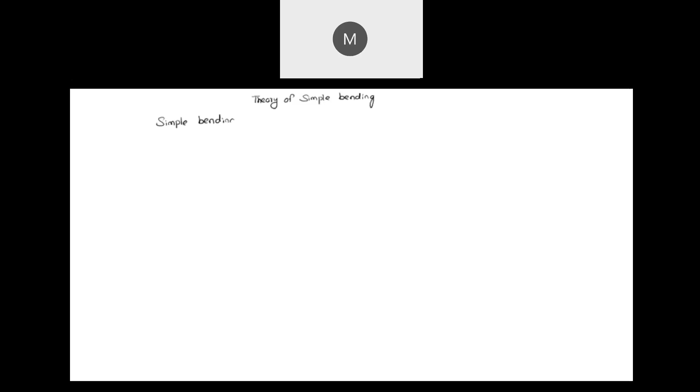Here is simple bending. Simple bending means pure bending, pure bending without any shear, without shear.

The basic assumptions are: the plane sections before bending remain plane after bending, and Hooke's law is valid.

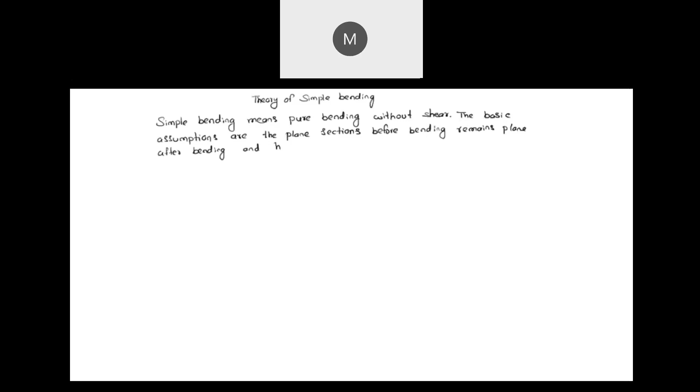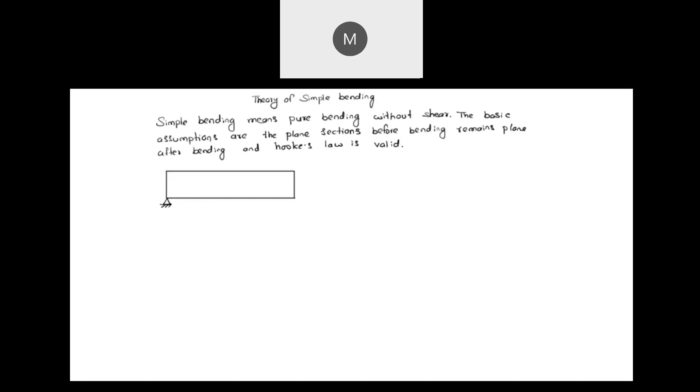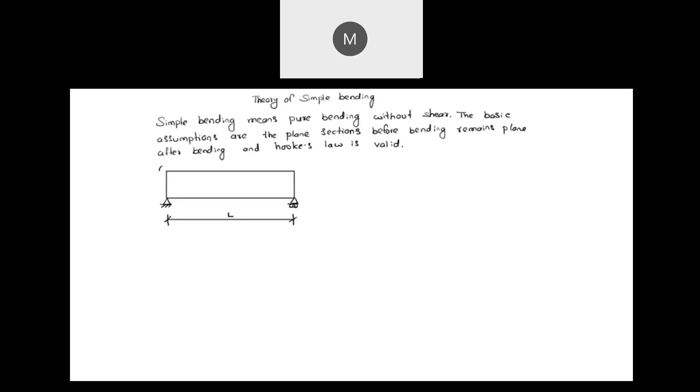Hooke's law is valid. Now let us take a simply supported beam of span L, carrying end couples M each, so that bending moment will be constant throughout the length of the beam and shear force will be zero.

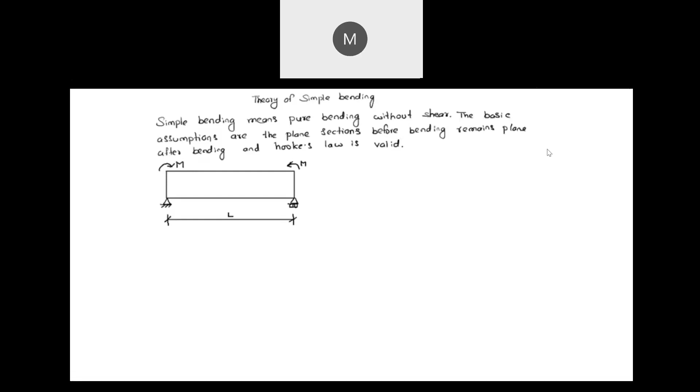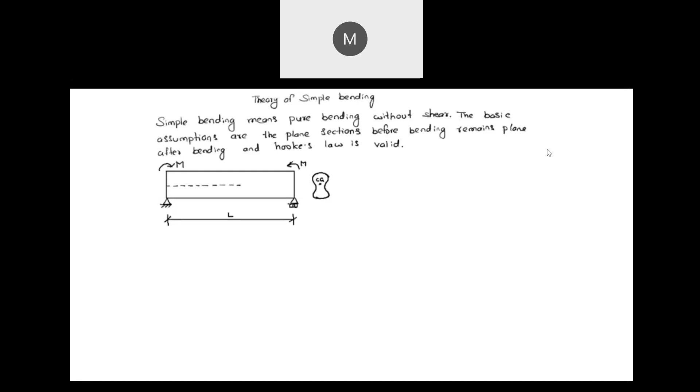Let us take any arbitrary cross section having vertical symmetry. Let us have CG somewhere here. The neutral axis always passes through the CG. We will define neutral axis later. This neutral axis, after bending also, its length is L only. That length will not change at the neutral axis.

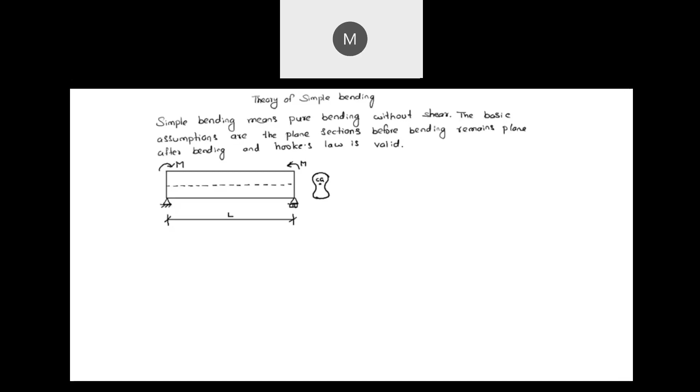Then due to this moment, the deflected shape of the beam is like an arc of a circle.

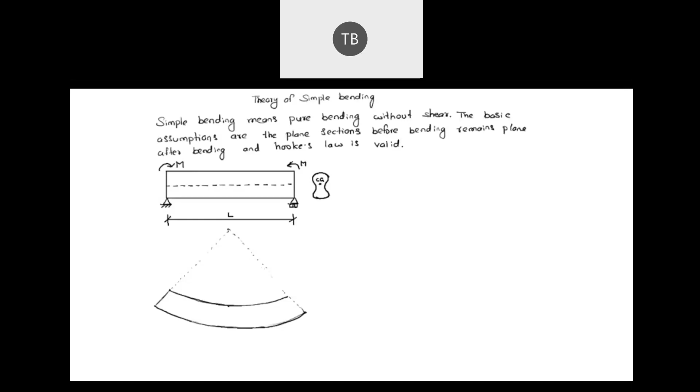It is like this. This is O, the center of curvature, and the neutral axis is here. The length of the neutral axis remains the same as L, and the layers above the neutral axis get compressed, and the layers below the neutral axis get elongated. The radius up to the neutral axis is called R, the radius of curvature of this deflected shape up to the neutral axis.

Let us take this angle as theta, then R into theta equals L. L equals R into theta.

Now we take a layer, y distance from the neutral axis. This layer, it is y distance from the neutral axis, that means here.

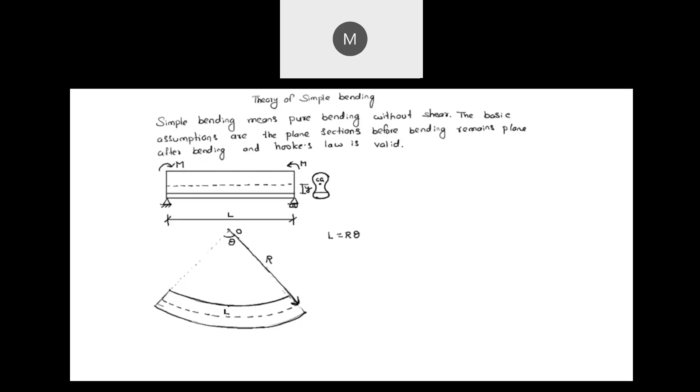Its distance is y. Then its length is L plus delta L. That layer length becomes L plus delta L because of that elongation amount delta L. That means, from the geometry, L plus delta L equals R plus y, into theta.

Theta is L by R, so y into L by R gives delta L by L equals y by R. Delta L by L, change in length versus length, that is called strain. So strain equals y by R. Since R is constant, strain is proportional to y.

So the strain diagram will be like this. The layers below the neutral axis get elongated, that's why tensile strain will be there at the bottom side, and compressive strain at the top side. Top compression, bottom tension. If you take compression as positive, tension will be negative. So this is the strain diagram.

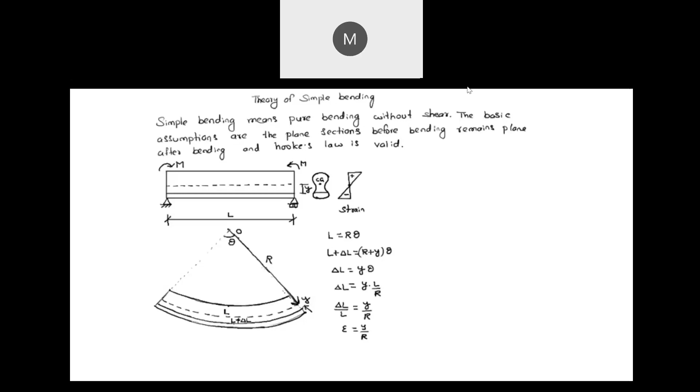According to Hooke's law, stress is proportional to strain, and stress equals strain into Young's modulus E. That is, strain is y by R, so F equals E by R into y.

So for a given material, E is constant, and for a given loading, R is constant. So F is proportional to y again. So the stress diagram also looks similar to the strain diagram, like this, with top compressive stress and bottom tensile stress.

So from this, F by y equals E by R. This is one fundamental relationship of the theory of simple bending.

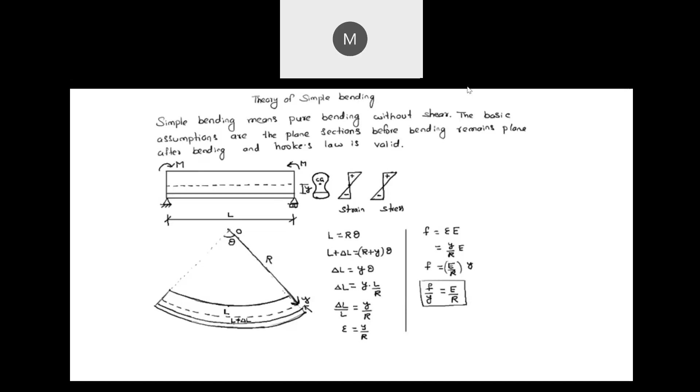Now we will relate the relation between external moment and internal stresses. So we know the cross section is like this, somewhere the neutral axis is there, and the stress diagram is like this.

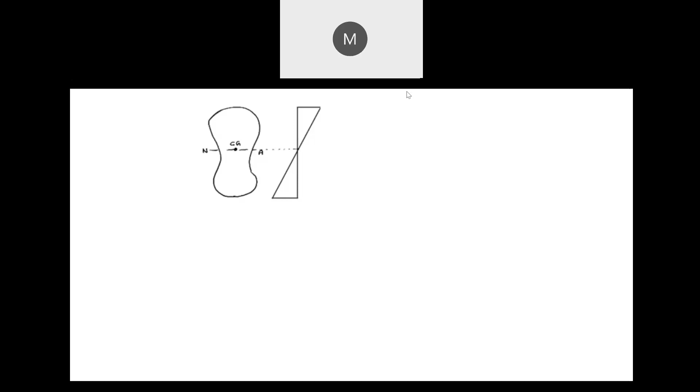Stress diagram is like this. This is the neutral axis passing through CG. Now this is compressive stress and this is tensile stress. Stress diagram, this is the cross section.

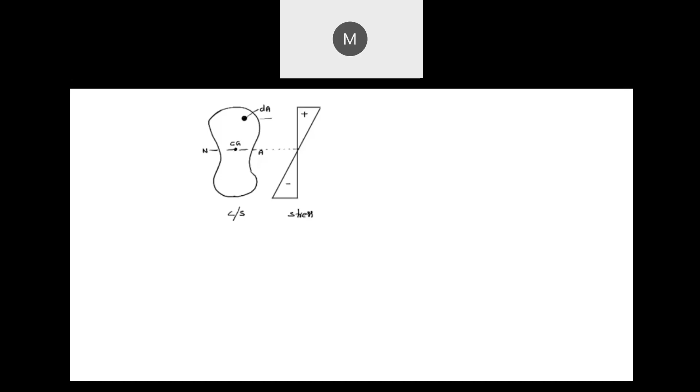Now if you take an element which is having dA area, which is y distance from the neutral axis, the stress at that location, let us take the stress as F.

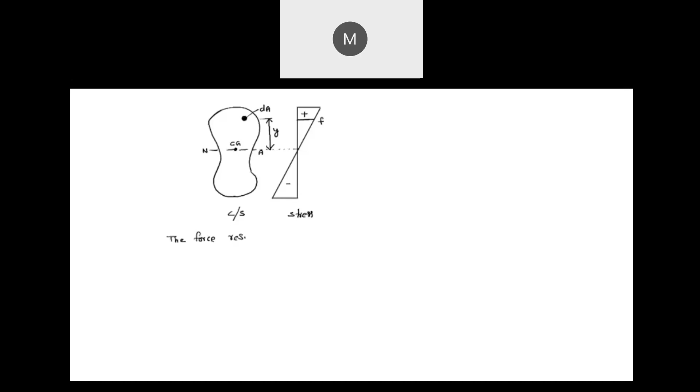Now the force taken by the elemental area dA equal to the force resisted by elemental area dA. Let us take dF equal to stress into area. Stress into area is force. So the force of resistance in dA area is this much.

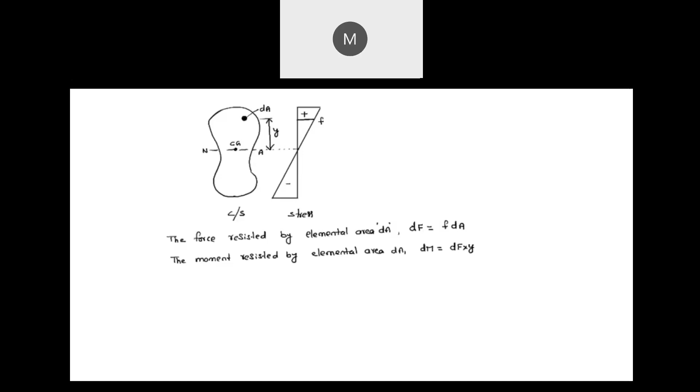And the moment resisted by elemental area dA, dm is nothing but dF into y, force into centroid distance. I mean, distance from neutral axis to centroid, its distance dA distance is y, dF into y, which is equal to f into dA into y.

But we know f by y equal to E by R. The relation already we know: F by y equal to E by R. We know that f is equal to E by R into y. So substituting that relation here, f value: E by R into y into dA into y, that is dm.

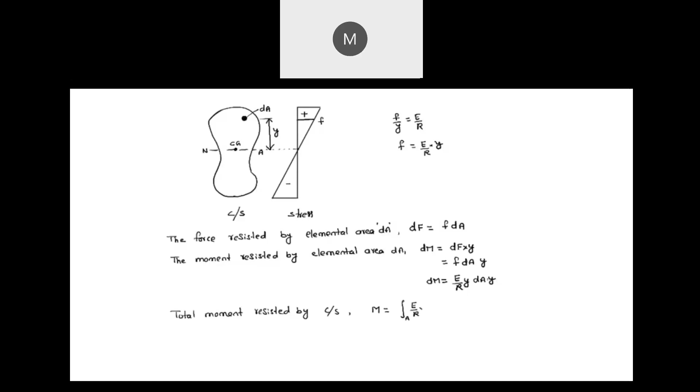Total moment resisted by cross section, m equal to integration over the area into E by R into y into dA into y, which is equal to E by R into integral y square dA over entire cross section area A. So which is equal to E by R into I,

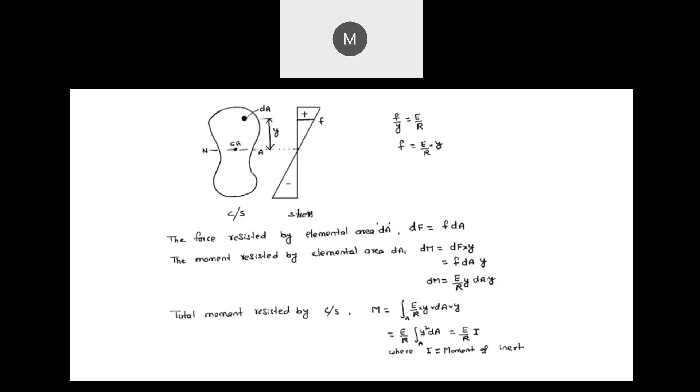where I equal to moment of inertia. So from this we can conclude that m equal to E by R into I, or m by I equal to E by R. So this is one relation actually.

So we have derived two relations. One is the previous relation: F by Y equal to E by R. Now m by I equal to E by R. So combining these two, m by I equal to F by Y equal to E by R. This is the fundamental equation of theory of simple bending.

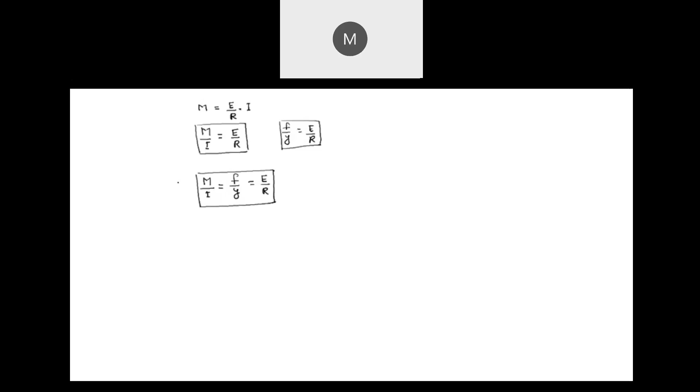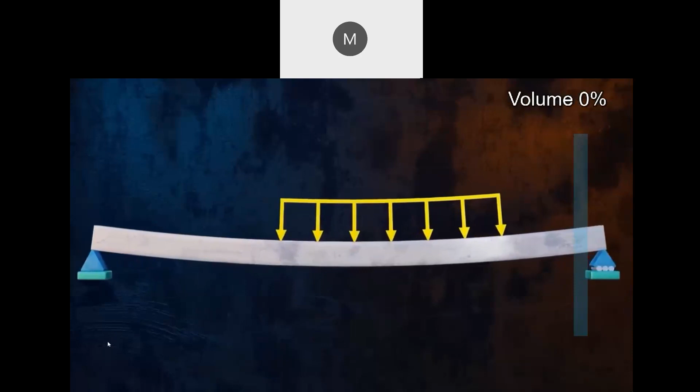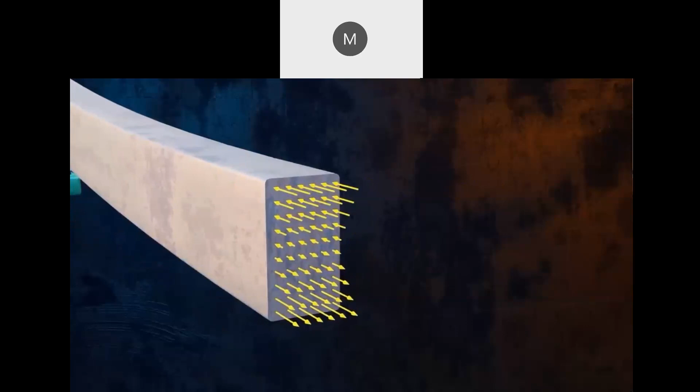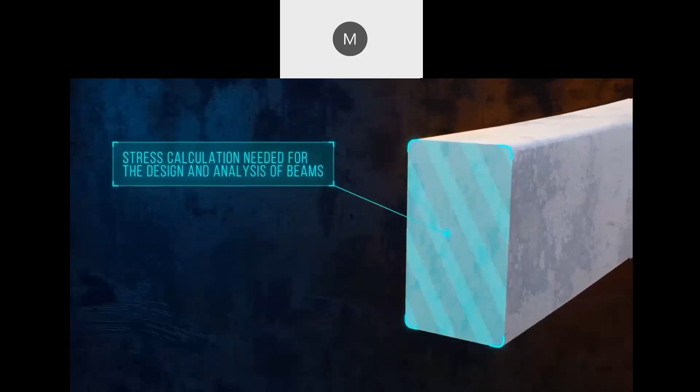If we apply a load to a beam, it will deform by bending. This generates internal stress, which can be represented by a shear force acting in the vertical direction and a bending moment. The shear force is the resultant of vertical shear stresses, which act parallel to the cross-section, and the bending moment is the resultant of normal stresses, called bending stresses, which act perpendicular to the cross-section. It's important to have a good understanding of these stresses because any design or analysis of a beam will involve calculating them. Let's look at bending stresses first.

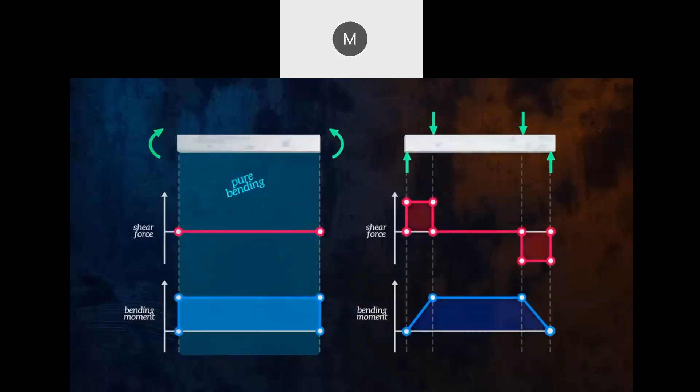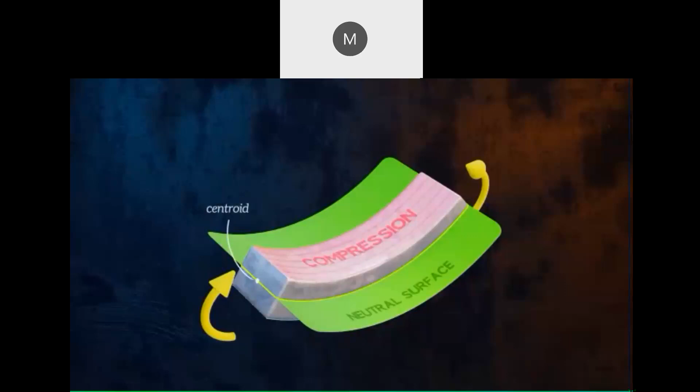Let's look at how a beam deflects when it has a constant bending moment along its length. If we imagine the beam as a collection of very small fibers, as the beam deflects, the fibers at the top of the beam get shorter, meaning that they are in compression, and those at the bottom of the beam get longer, so they are in tension. Somewhere between the top and the bottom of the cross-section, there will be a surface containing fibers which stay the exact same length. This is called the neutral surface. It passes through the centroid of the cross-section. When looking at the beam in 2 dimensions, we refer to it as the neutral axis.

Let's try and quantify the bending stresses that develop within the beam to resist these applied moments. First, let's calculate the strains in the beam. This can be done quite easily just by considering the geometry of the deformation. Let's watch how a fiber at the neutral axis between points A and B and a fiber between points C and D, located at a distance y from the neutral axis, deform.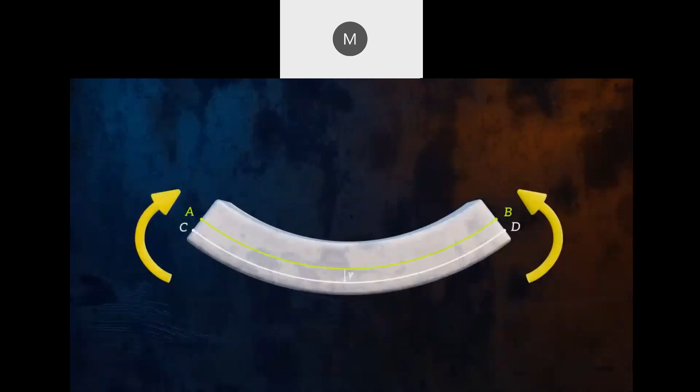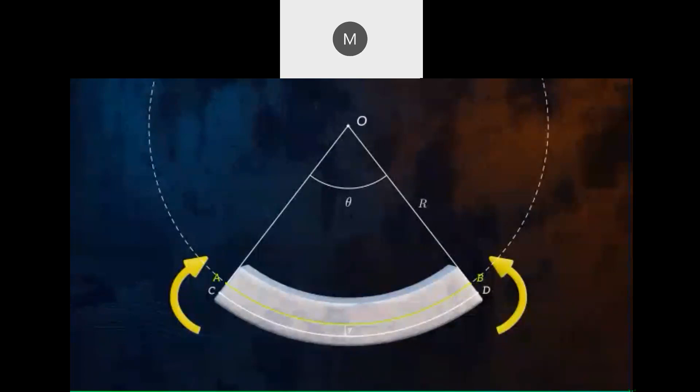Since this is a case of pure bending, we can see that the fibers bend into a perfectly circular arc. We'll call the center of the circle O. Before any deformation, the fibers are all the same length. After the deformation, the length of the neutral axis has stayed the same, but the length of the fiber between points C and D has increased. If theta is the angle of the arc and r is the radius of the arc to the neutral axis, we can calculate the length of the arc between A and B, like this, and we can calculate the length of the arc between C and D in the same way. Strain is defined as the change in length divided by the original length, and so we can derive an equation for bending strain at any distance y from the neutral axis.

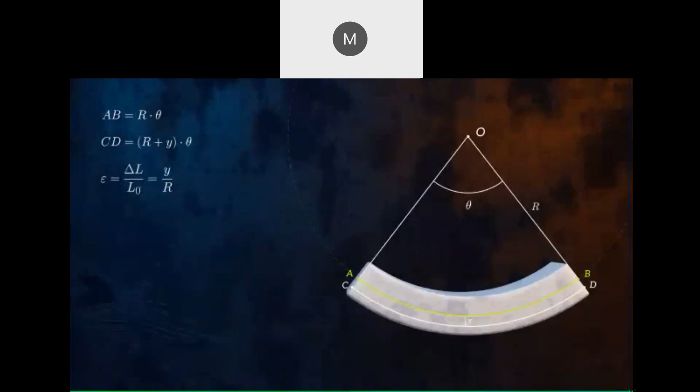We define the distance y as being positive downwards, and so this equation will give us a positive strain for the bottom of the cross-section, which is in tension. Sometimes you'll see this equation written with a minus sign, but that's because y was defined as being positive upwards.

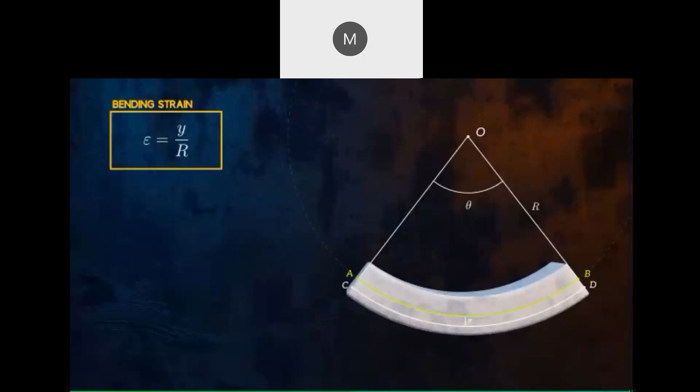If we assume that stresses remain within the elastic region of the stress-strain curve, we can then apply Hooke's law for uniaxial stress to calculate the bending stresses. This gives us the equation for bending stress as a function of the radius of curvature, r, of the deformation.

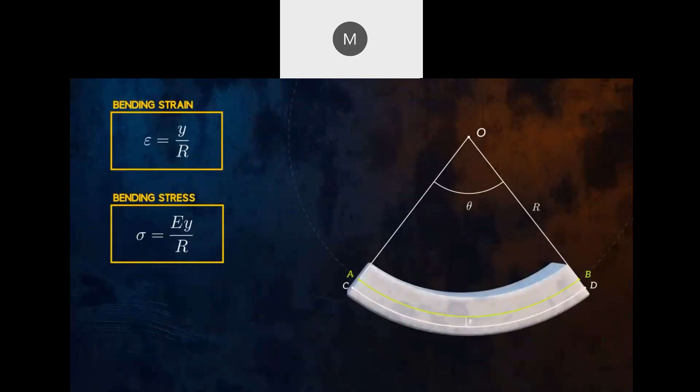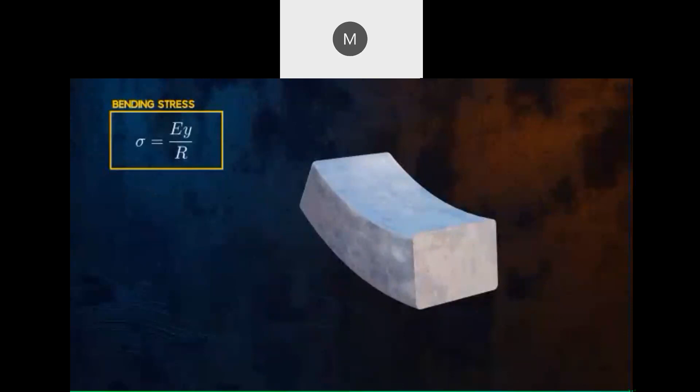But what we're really interested in is how the bending moment, m, affects the bending stress. If we make an imaginary cut through the beam, we can expose the internal bending stresses, represented here as a few discrete forces. The resultant moment of these internal forces must be equal to the bending moment m, and so we can calculate m by integration, like this.

Now we can plug in the equation for bending stress we just derived. When rearranged into this form, we can notice that the integral on the right is the definition of the area moment of inertia. This parameter, which I've covered in detail in a separate video, defines the resistance of a cross-section to bending due to its shape and is denoted using the letter I.

We can combine this equation for the bending moment with the bending stress equation to obtain what is known as the flexure formula.

So what does it tell us? Bending stress increases linearly as the bending moment and the distance from the neutral axis increase, and it decreases as the area moment of inertia increases.

The maximum stress occurs at the fibers furthest from the neutral axis. The term I over y max depends only on the geometry of the cross-section, and so it is called the section modulus, denoted using the letter S. You will often see the section modulus listed for a range of common beam cross-sections in reference texts.

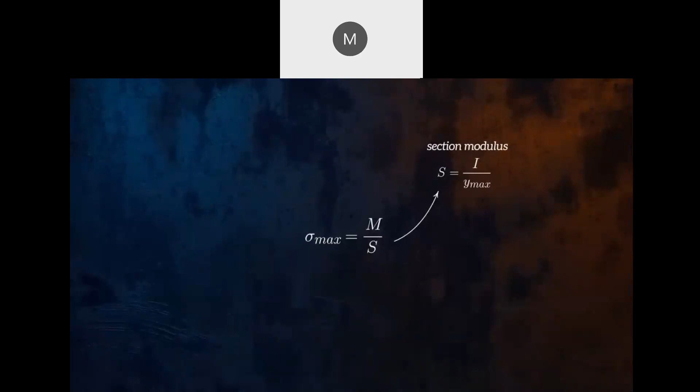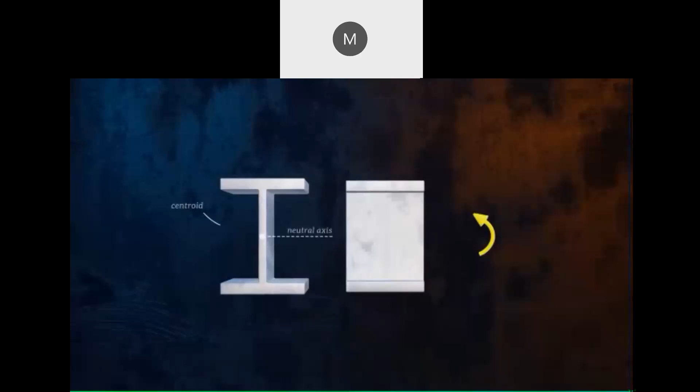The I-beam is a commonly used cross-section because it has a large area moment of inertia, which results in lower stresses. Here's how the bending stresses are distributed over an I-beam cross-section. They are zero at the neutral axis and reach a maximum at the outside surfaces of the flanges.

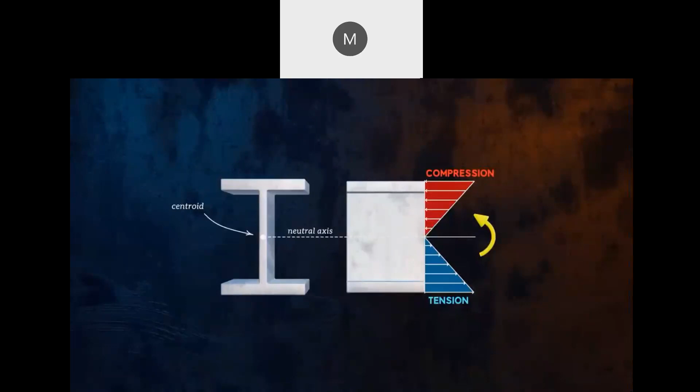For a T-section, the neutral axis is shifted upwards, and so the bending stress distribution looks like this.

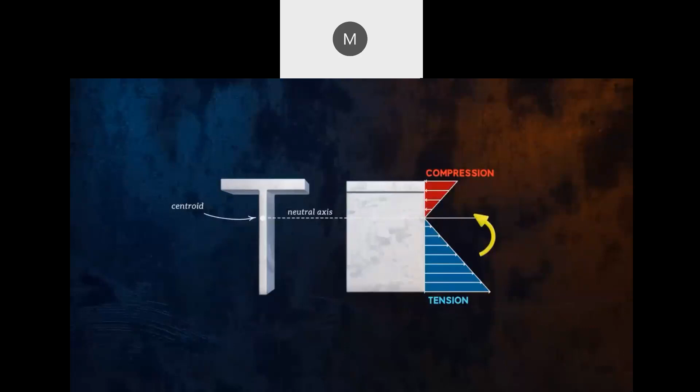So we've established how to calculate the bending stresses, which are normal stresses, for a case of pure bending. Most of the time, we won't have pure bending, as there will also be a shear force acting on the beam cross-section, like the beam we saw at the start of the video.

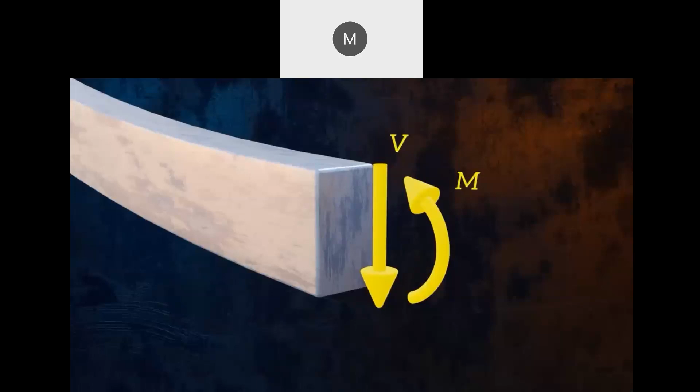It turns out that the presence of a shear force doesn't normally significantly affect the bending stresses, and so, luckily, we can consider the flexure formula we derived earlier for pure bending to be valid for a more general case of bending.

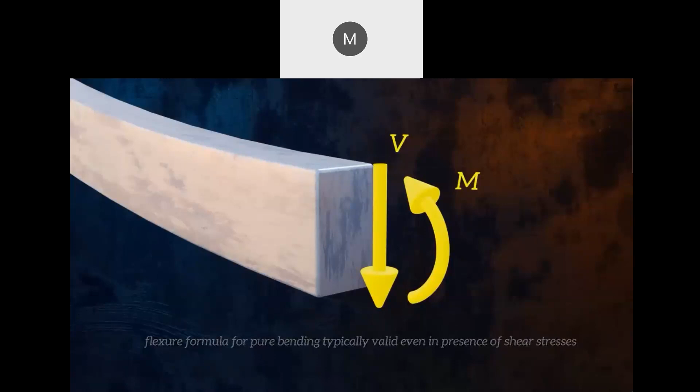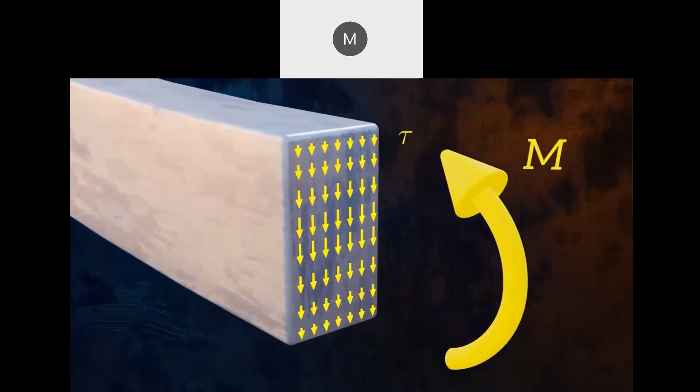The shear force V is the resultant of shear stresses, which act vertically, parallel to the cross-section. We denote the shear stresses using the Greek letter tau. To maintain equilibrium, these vertical shear stresses have complementary horizontal shear stresses, which act between horizontal layers of the beam.

One way to visualize these horizontal stresses is to consider a beam made up of several planks of wood. When a load is applied, there is a tendency for the planks to slide relative to one another. Now let's glue the planks together.

When the load is applied, the planks cannot slide, and so horizontal stresses develop between them. If these shear stresses are larger than the shear strength of the glue bond, the glue will fail.

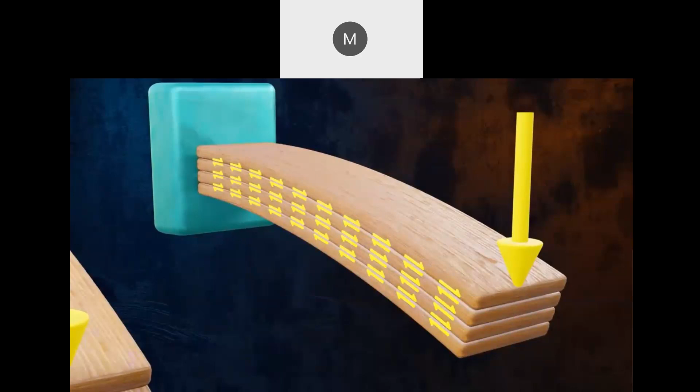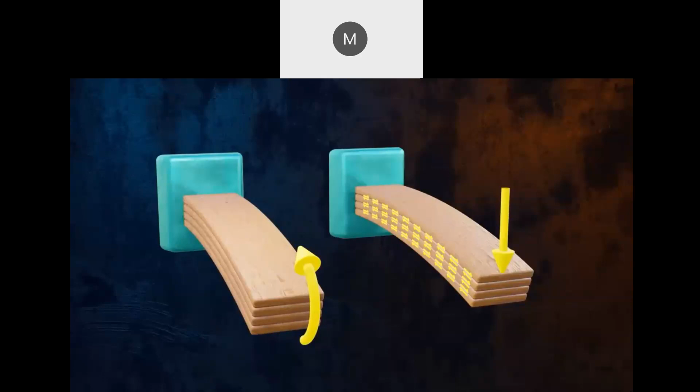These horizontal shear stresses don't exist if we apply a moment instead of a force, because that gives us a state of pure bending, and so there is no tendency for the planks to slide relative to one another. The presence of these horizontal shear stresses explains why wooden beams sometimes fail by splitting longitudinally. This failure usually occurs close to the neutral axis, for reasons which will soon be obvious.

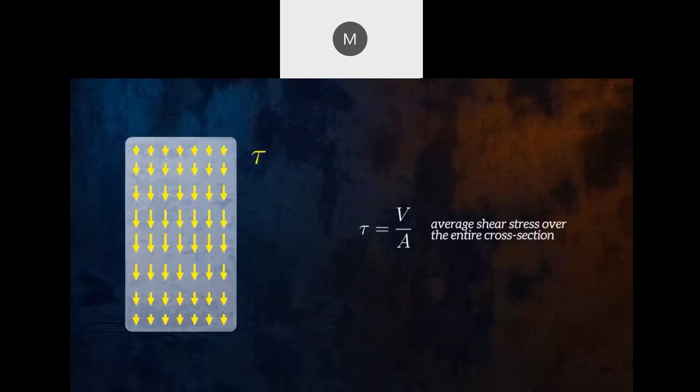So how can we calculate the shear stresses? We can calculate the average shear stress acting on the cross-section as the shear force V divided by the cross-sectional area. But the shear stresses aren't distributed uniformly across the beam cross-section. The shear stress has to be zero at the free surfaces at the top and bottom of the beam. So the average shear stress isn't very useful, since it doesn't tell us the maximum shear stress.

Instead, we can use this equation to calculate the shear stresses acting on the cross-section. I won't cover the derivation of the equation here, but it's based on considering equilibrium of stresses acting on a small element within the beam.

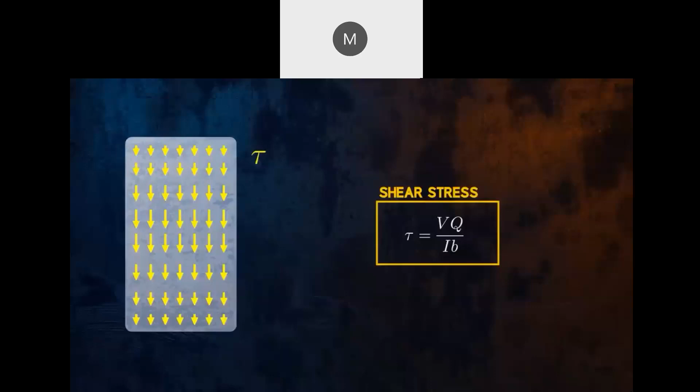The equation assumes that the shear stress is constant across the width b of the cross-section. So tau is a function of the distance along the beam, x, and the distance above the neutral axis, y. V is the shear force acting on the cross-section, which varies with the distance along the beam. B is the width of the cross-section. It can vary with the distance y from the neutral axis, but in this case, the cross-section is rectangular, so B is constant.

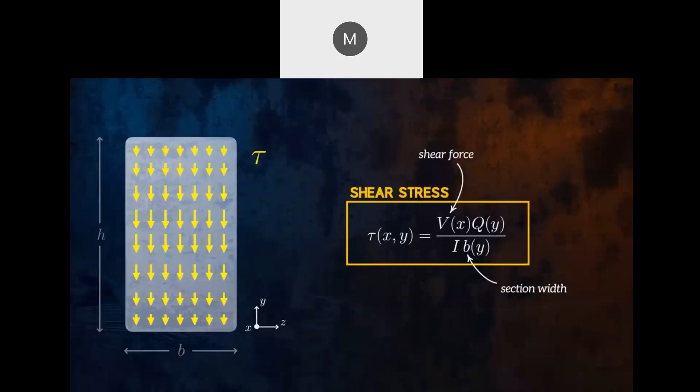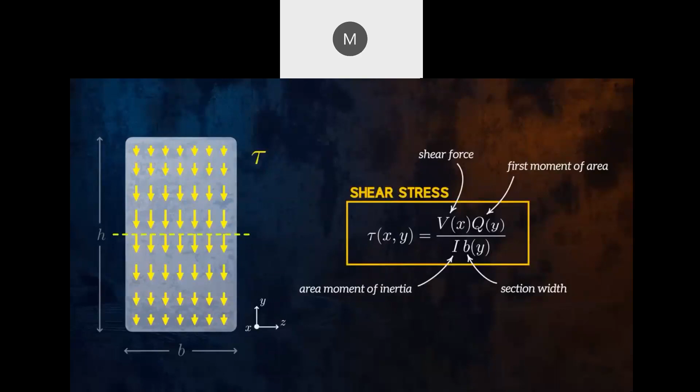I is the area moment of inertia, a constant value calculated based on the shape of the cross-section. Q is the first moment of area for the portion of the cross-section above the location we want to calculate the shear stress for, so it varies with the distance y above or below the neutral axis. It is equal to the product of the area above the location of interest and the distance between the centroid of that area and the neutral axis.

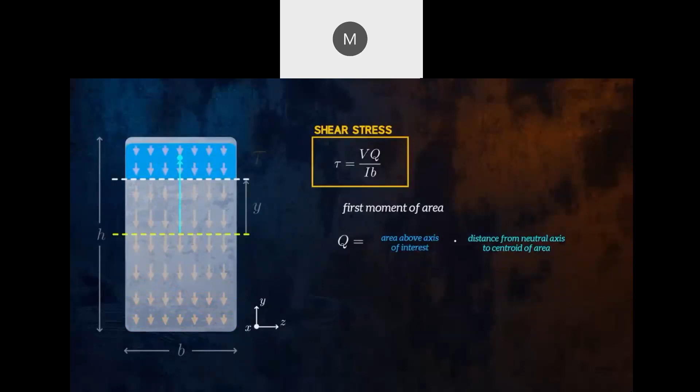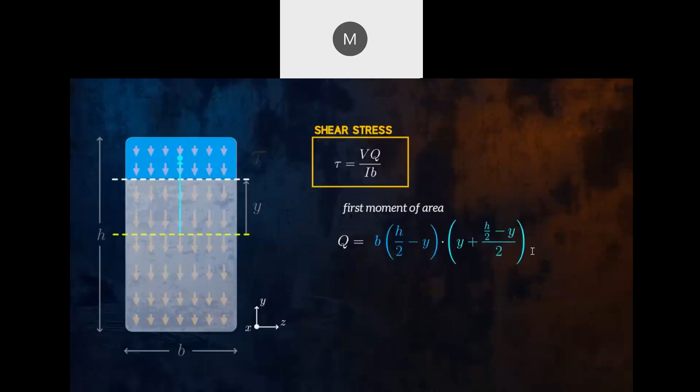If the location of interest is below the neutral axis, we consider the area below the axis instead of the area above it. To calculate the first moment of area at this line, at a distance y from the neutral axis, we multiply the area of the blue rectangle above the line by the distance from the neutral axis to the centroid. Doing this calculation gives us an equation for Q as a function of the distance y from the neutral axis for a rectangular cross-section.

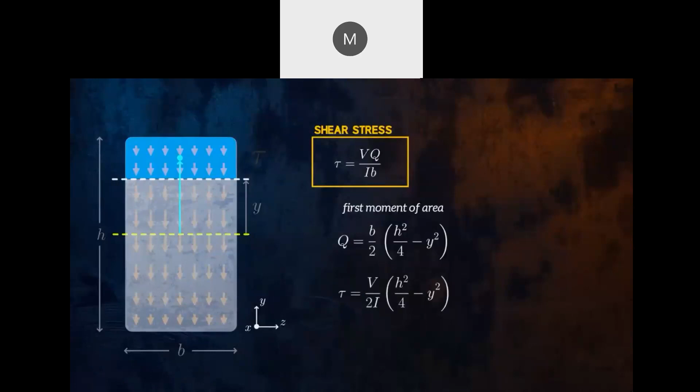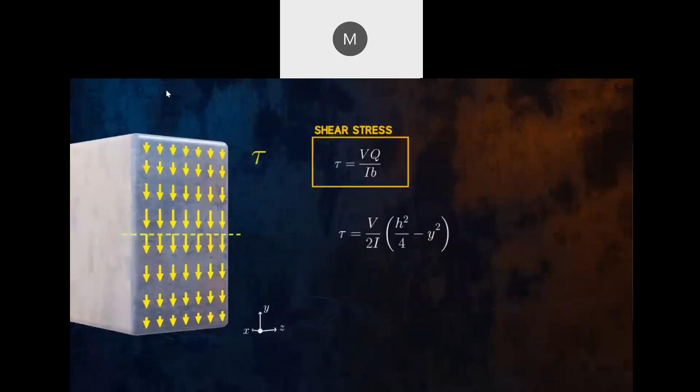And so we can obtain an equation which describes how the shear stress varies with distance from the neutral axis. The y term is squared, so the shear stress varies parabolically over the height of the cross-section, with the maximum shear stress occurring at the neutral axis. This is opposite to the bending stress, which is zero at the neutral axis.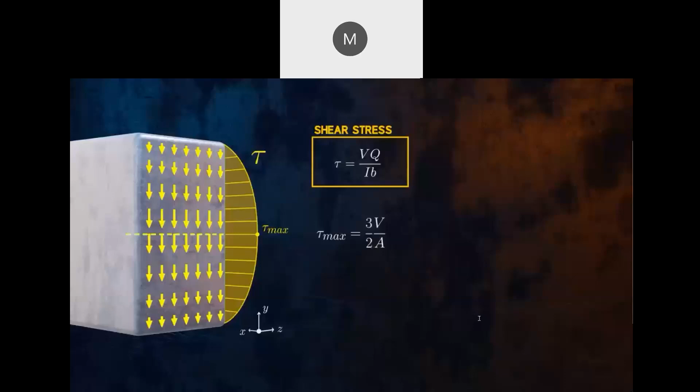It explains why the horizontal shear failure of a wooden beam we saw earlier occurs close to the neutral axis. By setting y to 0 in this equation, we obtain an equation for the maximum shear stress in rectangular cross-sections. It is equal to 1.5 times the average shear stress across the entire cross-section.

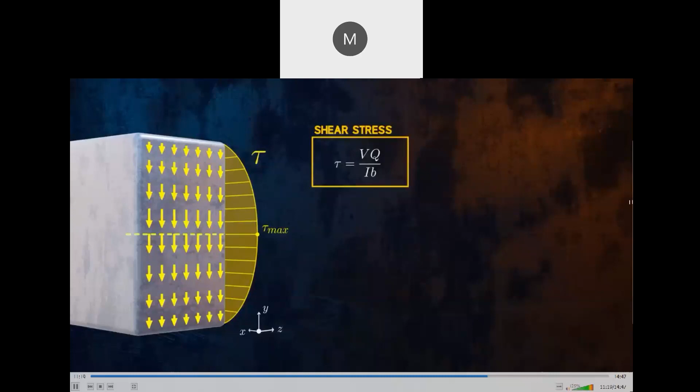The derivation of this equation for shear stress makes a few assumptions, so we need to be careful with how we apply it. First, it assumes that the shear stresses are constant across the width of the cross-section. For rectangular cross-sections, this is a reasonable assumption if the rectangle is thin.

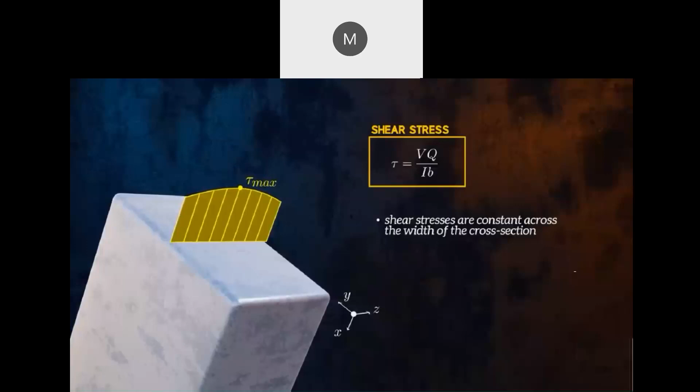But for cross-sections like this one, the shear stresses can vary significantly over the width. And so, in these cases, the equation can really only give us the average shear stress across the width of the cross-section. It can't tell us what the maximum shear stress will be.

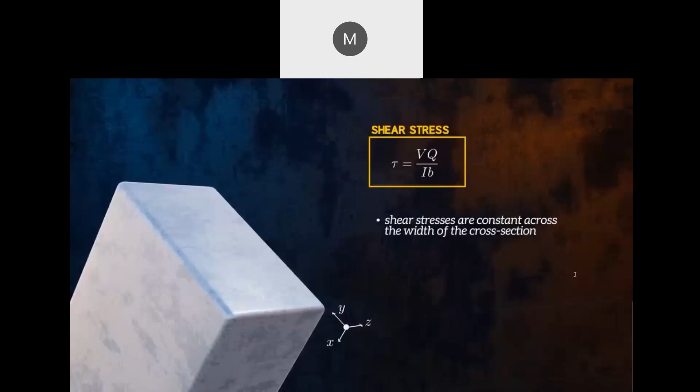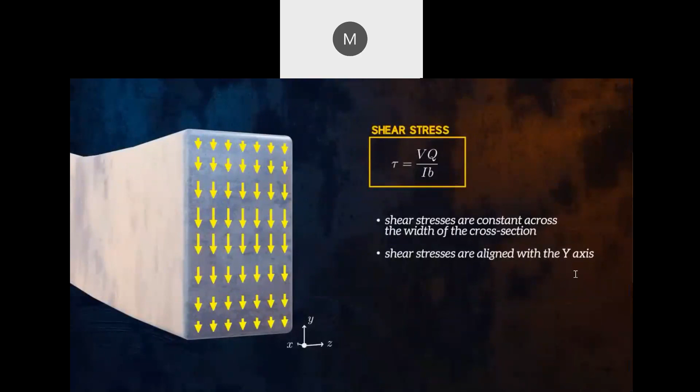Another assumption this equation makes is that the shear stresses are aligned with the y-axis. Shear stresses act tangentially at a free surface, so for a circular cross-section, for example, we can't strictly use this equation to get the distribution of shear stresses across the height of the cross-section, but we can still use it to estimate the shear stresses at the neutral axis, because the shear stresses there are aligned with the y-axis.

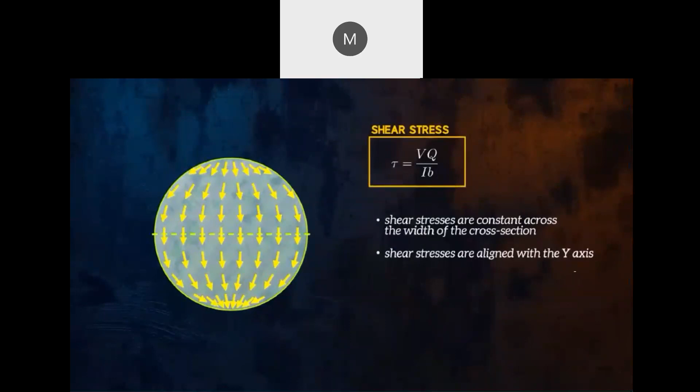The equation for shear stress at the neutral axis in a circular cross-section is similar to the equation for a rectangular section, where we have the average shear stress V over A multiplied by a constant. The constant is 4 over 3 for a circular cross-section and 3 over 2 for a rectangular one.

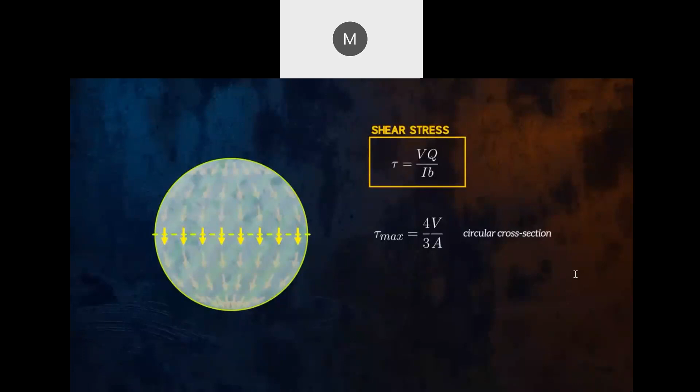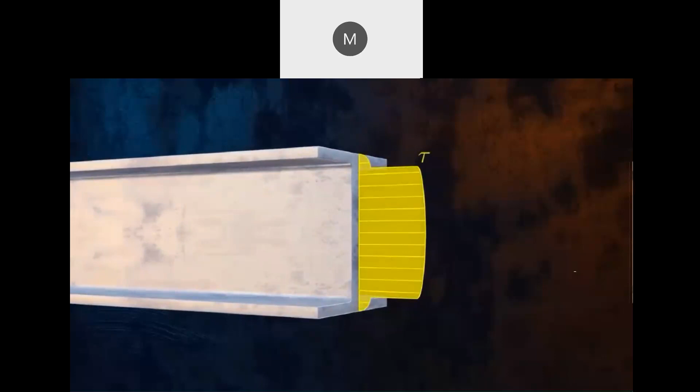This means that the vertical shear stress is distributed like this. The web mostly carries the shear force, and the flanges mostly carry the bending moment, as we saw earlier. You can see that the shear stresses are distributed quite evenly over the height of the web.

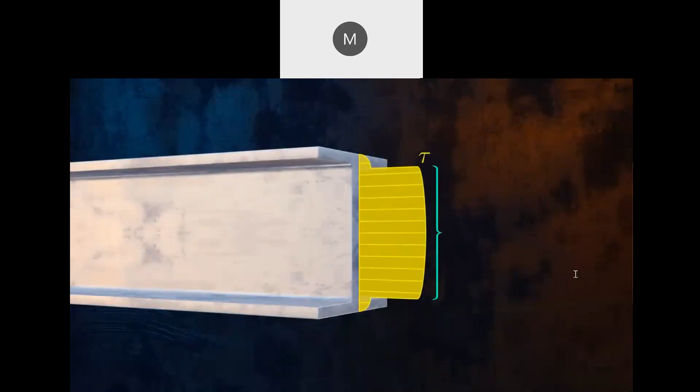This is because the flanges contribute significantly to the first moment of area Q when calculating the shear stresses in the web, but they don't carry much of the vertical shear force. Since the web is thin, the shear stresses are also distributed evenly across its width. Because of this, we can easily calculate the approximate shear stress in the web, like this.

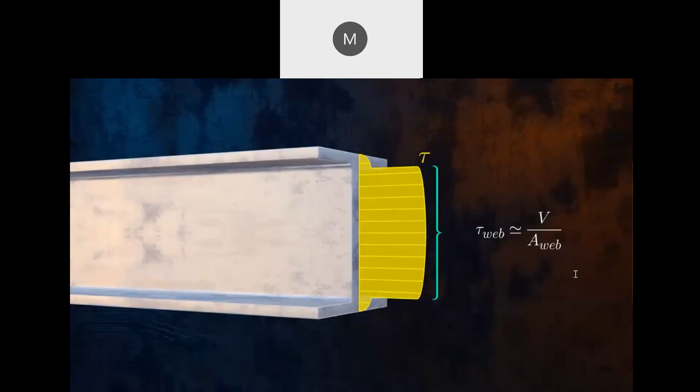More detailed analysis reveals that there are shear stresses in the flanges, but they are acting mainly in the horizontal direction. The horizontal stresses on both sides of the flanges cancel each other out, so the net shear force is still just a vertical force. We can figure out the direction of the horizontal shear stresses based on the direction of the vertical shear stresses by imagining that the stresses are flowing through the cross-section.

That's it for this review of bending and shear stresses in beams.